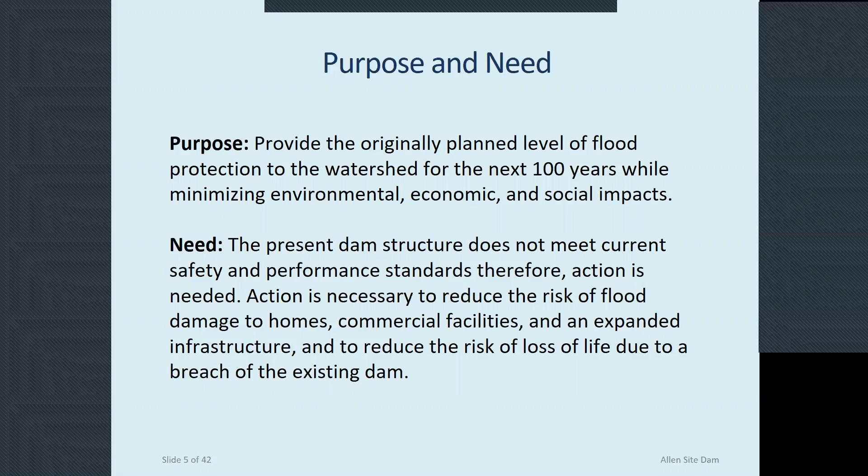So, dam rehabilitation, planning, and implementation process. This project goes back a number of years, and there is a specific process through, and we're in number 4, the planning portion of this process. That process is for selection of a preferred alternative, meaning this is what we're expecting to design and advance into construction down the road.

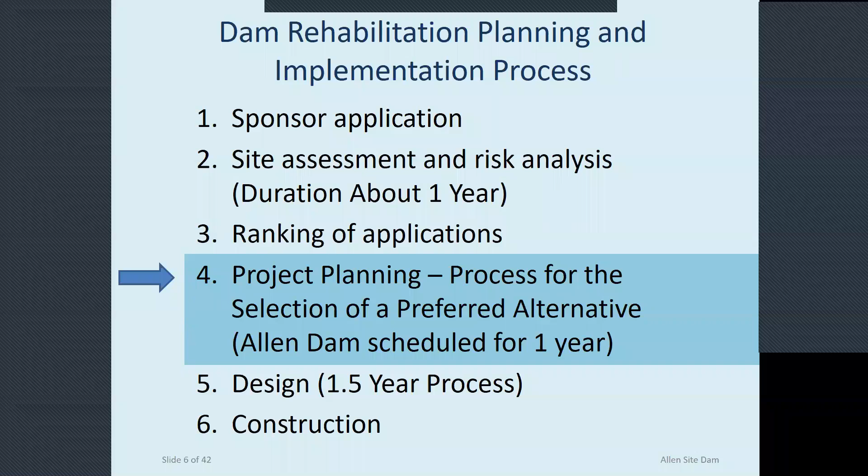The next step after this planning process, which is expected to be completed around July 2021, so 8 to 9 months from now, would be followed by final design and then construction, tentatively scheduled for summer of 2023.

As a brief recap, back in 2015 NRCS completed an assessment of this dam because the dam is approximately 40 years old, and they wanted to check in as part of their process. The outcome identified that there were some issues, nothing of significance, but mostly issues that will extend the safe use of this dam for the next 100 years. So the town requested assistance, federal funding assistance, working within the NRCS program.

In May of 2019, the project was advanced, funding was secured, and the project went into the planning phase. We came on board back in September of 2019. This past January 14th, Charlie and I and Darren, Jim, Carl, all of us were at Town Hall, where we made the first public informational presentation of this project. That same day we also had our first scoping meeting with various government resources and agencies.

At that meeting, we laid out what the purpose of the project was and the alternative formulation process. We also indicated that we'd be spending the summer and into the fall identifying and evaluating alternatives, and that we would be coming back and presenting these alternatives to the public in late fall. So here we are on the 17th doing just that.

So Charlie Johnston, our project engineer, is going to walk us through some of the specifics of the dam. Charlie, you have the floor.

Good evening. My name is Charles Johnston. I'm a project engineer. We just want to give you a brief background of Allen Dam. It was constructed in 1981, approximately 39 to 40 years ago, for flood control for the town of Walpole. It's located just southeast of Washington Street on the Diamond Brook, or Spring Brook as it's often referred to.

It's an earthen embankment dam, approximately 1,500 feet long and 21 feet tall. It consists of a two-stage concrete principal spillway structure, outlet pipe, and outlet works, with an earthen auxiliary spillway.

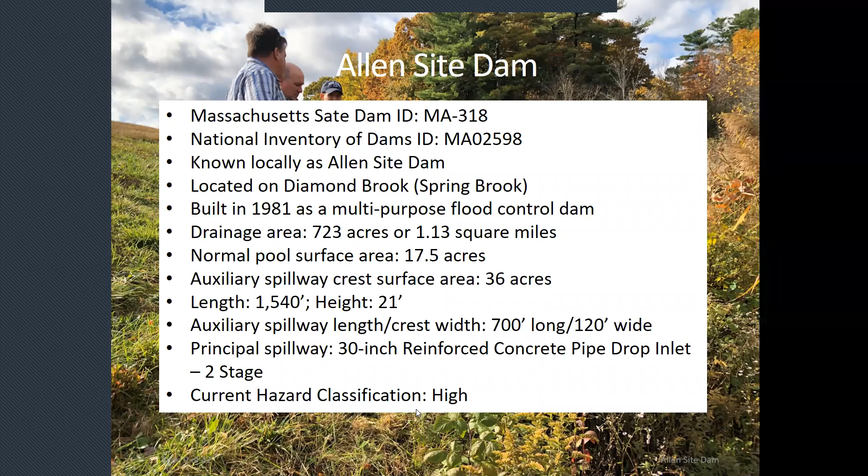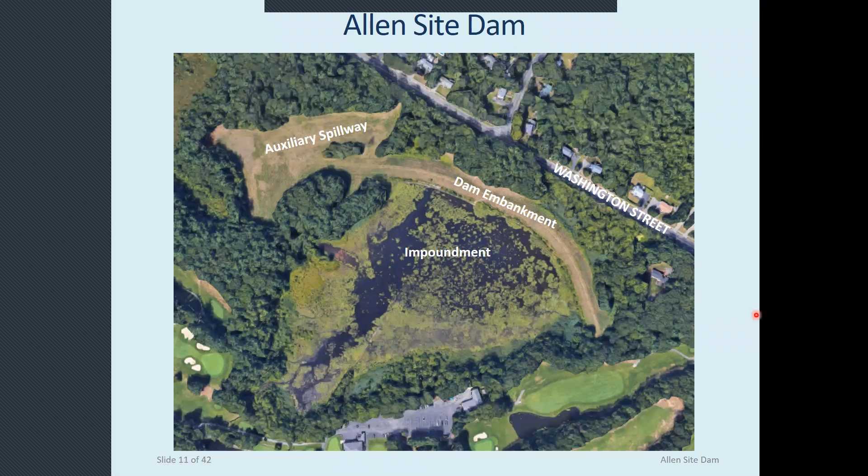I want to show you a typical cut view of an earthen dam to identify key components. We have the impoundment, which is the pond or reservoir behind the dam, the concrete structure and trash rack, which controls the normal water level and typically has a drop inlet for higher flood events. That discharges through an outlet pipe to the outlet works, which discharges downstream, and an auxiliary spillway, which controls flow for larger flood events, such as the 500-year flood event.

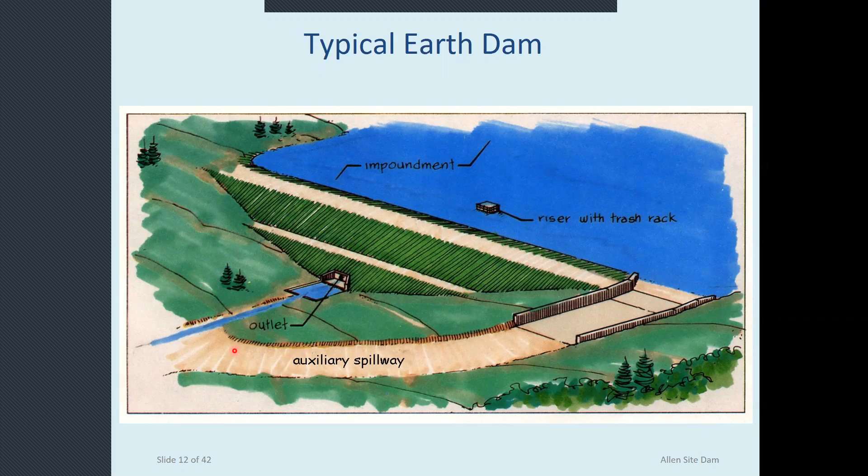Allen Dam is safe and is in good condition. It is not in imminent danger of failure. The purpose of this project is to implement preventative measures to extend the safe service life of the dam for the next 100 years and to prevent problems later on. The dam is inspected annually by the Public Works Department, and by Massachusetts state law is inspected by a professional engineer every 2 years. It's regularly mowed and maintained.

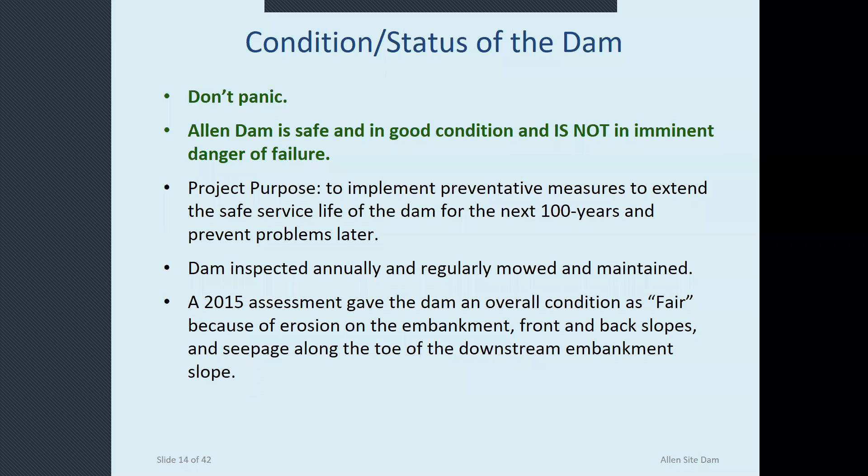A 2015 assessment of the dam found that it has an overall condition of fair, with some minor erosion occurring on the back and front slopes of the embankment and seepage occurring along the toe of the dam. Emily Lewis will explain the resource concerns for this project.

Thank you, Charlie. I'm Emily Lewis, environmental planner, and I've been working on the various resources. So we first began looking at these with the scoping meeting back in January, and then determining which ones are relevant to the proposed action or the preferred alternative that we will present later on this evening.

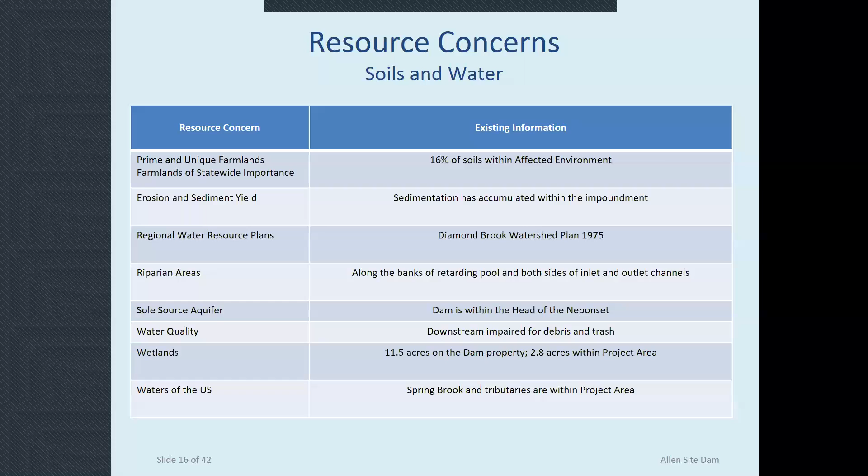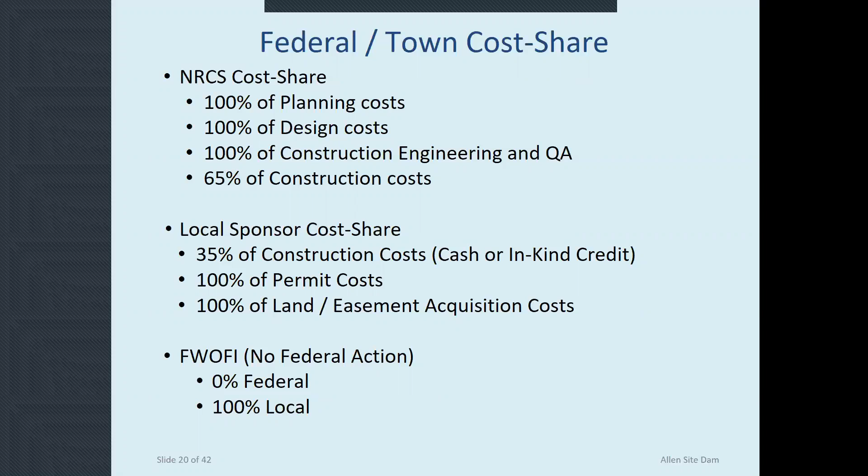The formulation process of the alternatives begins with the town of Walpole and NRCS. We've been working together here for the past 12 months, as we've said. We identified the deficiencies, the problems, and the need for the action. We've done detailed technical engineering work in developing these alternatives in conjunction with the PR&G guidelines that NRCS works towards, and identified these alternatives.

One that is required, as we just mentioned and Charlie will speak to in a moment, is the future without federal investment, decommissioning of the dam, meaning its removal, and removal of flood control. Non-structural alternatives include elevating structures out of the floodplain or relocating them, or updated zoning to prevent additional or future development. And certainly structural rehabilitation, repairing the dam so it meets both Massachusetts state dam safety and federal NRCS design criteria.

The locally preferred alternative normally aligns with one of these other ones, but we'll talk more about that in a moment. Similarly, the National Economic Efficiency, or NEE, which is part of the PR&Gs, ensures we're looking not just at costs, but other impacts including cultural, societal, historical, economic, and environmental. Lastly, the criteria for selection include completeness of the alternatives, their effectiveness, efficiency, and acceptability.

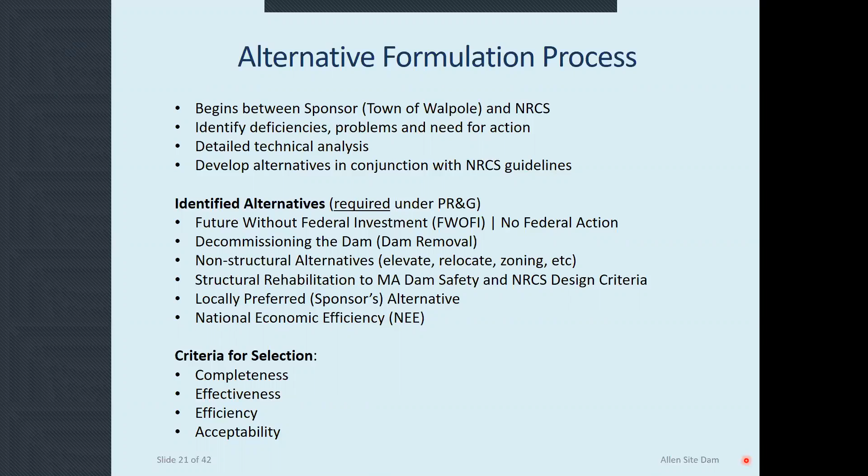The first alternative we were required to examine was the future without federal investment, or the no federal action alternative. This includes actions the dam owner, the town of Walpole, would take to correct deficiencies and bring the dam into compliance with Massachusetts dam safety rules. The primary deficiency is the inability of the dam to safely pass the half PMF, or half probable maximum flood. Hydraulic modeling indicates the auxiliary spillway is subject to significant head cutting or erosion, and a predicted failure through its control section may happen.

To correct this deficiency, this alternative consists of armoring the auxiliary spillway with an articulated concrete block system, or an equivalent armoring system, to reduce the potential for erosion and safely pass the half PMF. The estimated construction cost for this alternative was $2.6 million, of which the town would be 100% responsible, as no federal cost share is included in this alternative.

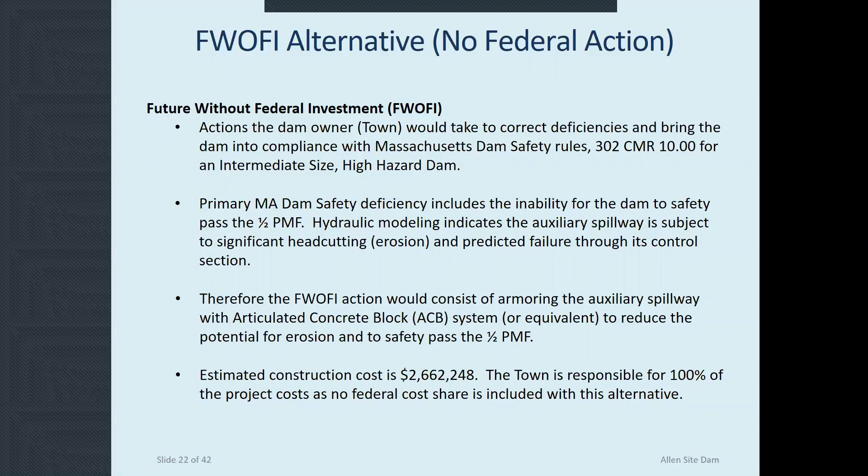Next, the required alternative we examined was decommissioning, or dam removal. This alternative includes removal of the flood control function from the dam, reconstructing and restoring the pre-existing stream and floodplain functions. It would involve excavation of approximately 7,400 cubic yards of soil from the dam embankment, demolition and disposal of the concrete principal spillway system, and restoration of the stream and upstream wetlands.

This also involves providing flood protection measures to structures and infrastructure downstream of the dam, including floodproofing buildings, acquisition and relocation of structures, infrastructure upgrades to buildings and culverts, and modifying zoning regulations to address future development in the floodplain. The estimated total project cost is between $7 and $8 million to implement the decommissioning of the project.

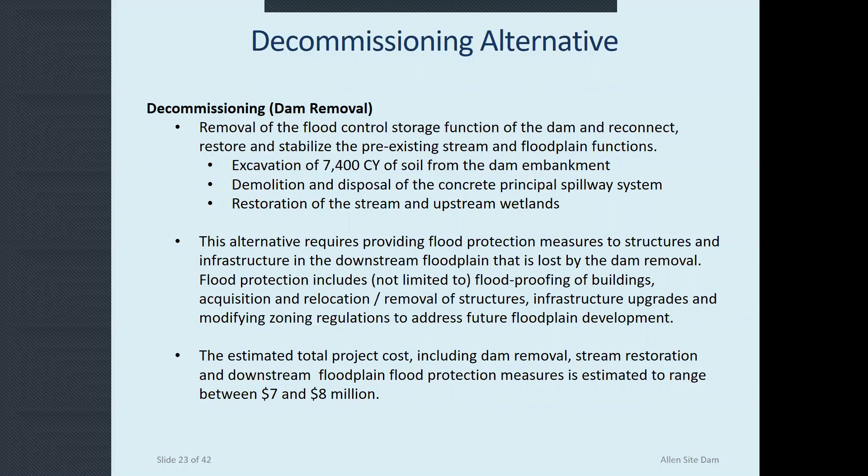We have a plan depicting the decommissioning alternative. Washington Street is located at the top of this plan. To the left is the earthen auxiliary spillway, and the dam embankment, which spans from left to right.

There's a notch that we have created in the dam where the 7,400 cubic yards will be removed, to remove the flood control function of the dam and then permanently drain the reservoir. The shaded area depicts where the stream would reestablish, and the crosshatch depicts where there would be a loss in that water surface, and you would probably see wetland conversion.

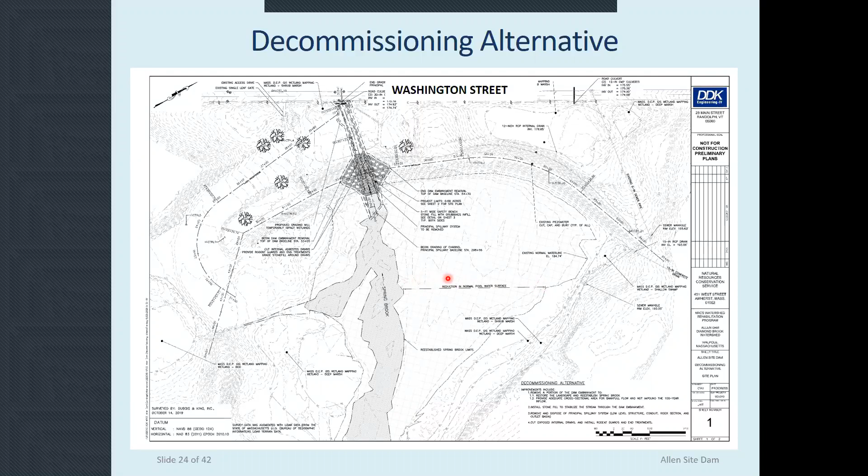Following the decommissioning example, we examined rehabilitation alternatives. These alternatives are to correct deficiencies that do not meet state of Massachusetts dam safety standards and NRCS criteria.

The primary deficiencies that do not meet the standards above include the existing auxiliary spillway being activated by the principal spillway hydrograph, a breach through the auxiliary spillway section during the half probable maximum flood and the freeboard hydrograph event. The dam is overtopped during the freeboard hydrograph event, and there are internal drainage issues with filter compatibility with the surrounding soils and seepage at the toe of the northern portion of the dam.

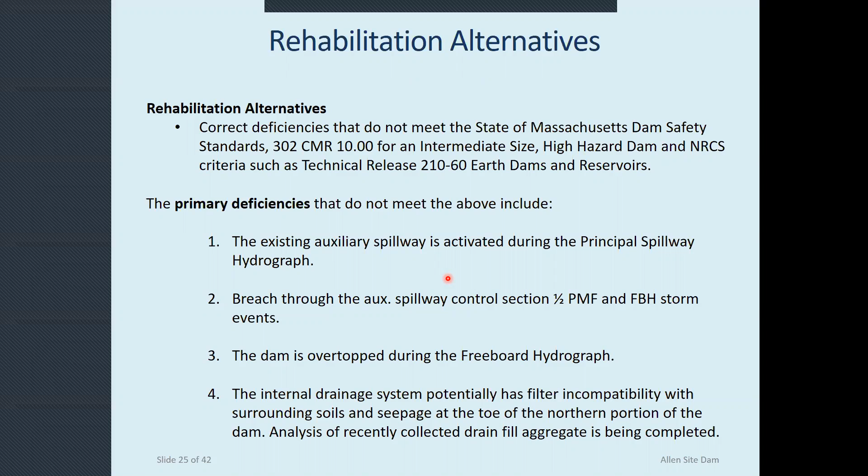In the prior slide, we identified that the rehabilitation alternatives are required to correct the deficiencies in the dam to meet federal and state dam safety criteria. We identified 7 structural rehabilitations that could occur at Allen Dam.

Alternative 1 consists of raising and armoring the auxiliary spillway with articulated concrete blocks, maintaining the pool at its original water level, and raising the overall top of dam embankment by 9 inches.

Alternatives 2 and 3 are similar to alternative 1, where we raise and armor the auxiliary spillway, raise the dam, and maintain the pool level. But instead we will be using two different auxiliary spillway armoring technologies: one with roller compacted concrete, and the other with a concrete precast subsurface slab.

Alternative 4 is also similar to alternative 1. However, we're going to widen the auxiliary spillway from 120 feet to 155 feet to increase the hydraulic capacity so that we can reduce how much we need to raise the dam.

Alternative 5 is similar to alternative 1 as well. Instead, we're going to lower the pool approximately 1.8 feet to provide additional flood storage capacity so that we can reduce how much we need to raise the top of the dam.

Alternative 6 consists of constructing a new auxiliary spillway over the dam embankment with roller compacted concrete, abandoning and filling the existing auxiliary spillway, and raising the top of dam by 9 inches.

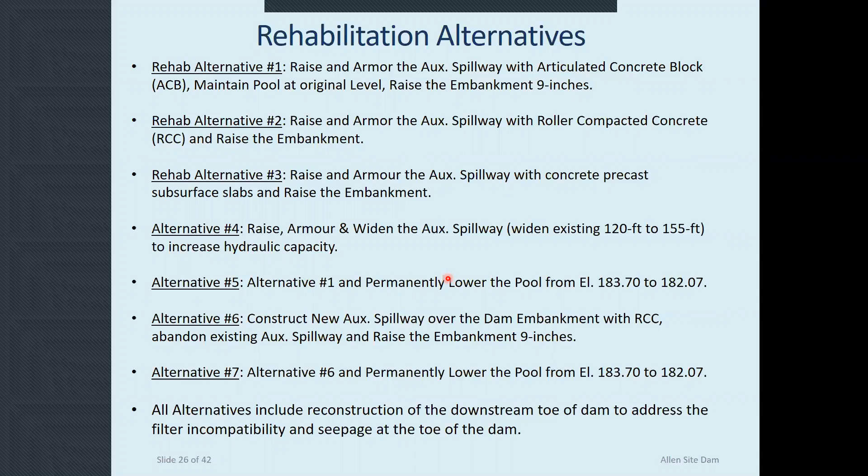As part of our alternative formulation process, we need to consider but eliminate alternatives that do not fully meet the PR&G criteria. At Allen Site Dam, this includes the decommissioning alternative, non-structural alternatives, as well as rehabilitation alternatives 2, 3, and 4.

Decommissioning was eliminated because it has a significant and adverse impact to cultural and societal resources downstream of the dam, as well as the cost to implement being 2 to 3 times greater than the cost of the future without federal investment and the retained rehabilitation alternatives.

The non-structural alternative, similar to decommissioning, includes elevating, floodproofing, and relocating buildings in the downstream floodplain, modifying roadways and infrastructure, and zoning requirements. This was eliminated because it does not address the deficiencies at the dam and may allow the dam to fail in the future. In addition, the estimated cost is $10 to $15 million, much larger than the rehabilitation alternatives that we retain.

Rehabilitation alternatives 2, 3, and 4 were also removed because they provide the same level of flood protection, but have a higher construction cost.

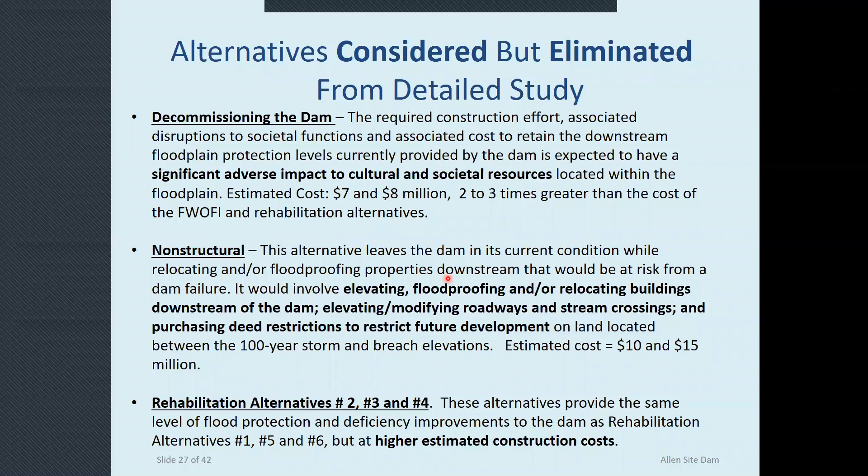The alternatives that meet the PR&G criteria and were retained for detailed study are: the future without federal investment, or no federal action; structural rehabilitation number 1, utilizing articulated concrete blocks for armoring; alternative 5, which is alternative 1 with a lower pool for flood storage capacity; alternative 6, which constructs a new auxiliary spillway over the dam embankment with RCC; and alternative 7, which is alternative 6 with a lower pool for flood storage capacity.

The next several slides will illustrate the structural alternatives that were carried forward for detailed study.

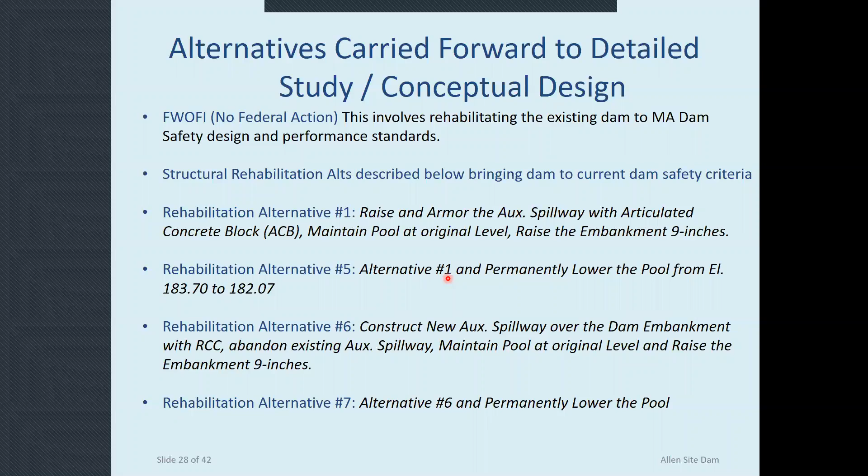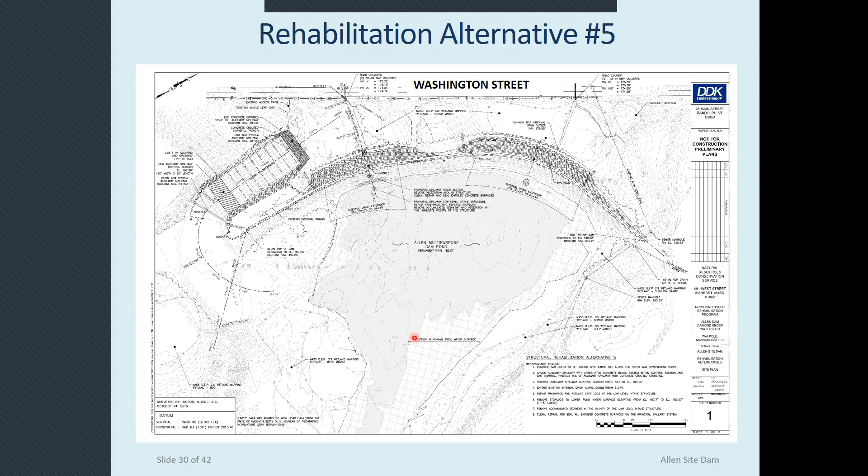For alternative 5, there are similar improvements to the dam with auxiliary spillway armoring, the top of dam being raised, and reconstruction of the toe. This alternative utilizes a reduction of the pond by 1.6 feet, which is the main difference between alternative 5 and alternative 1. The cross-hatched area is where we expect we'll need to reestablish wetlands, and the shaded area is where we expect the permanent pool to be established.

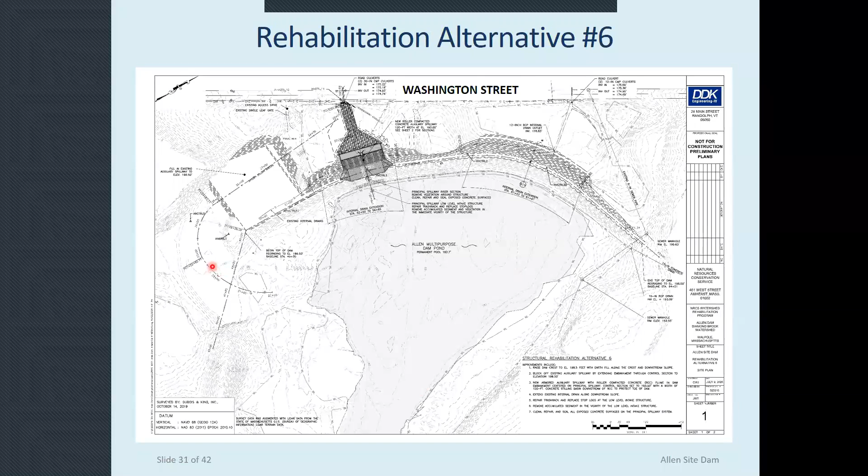Alternative 6 utilizes reconstructing a new auxiliary spillway over the center of the dam with roller compacted concrete, a new stilling basin, and reshaping of the downstream channel. Excess material will be used to fill in and abandon the existing auxiliary spillway and to raise the dam embankment. The downstream toe will be reconstructed for filter incompatibility and seepage at the northern portion of the dam. Improvements to the principal spillway structure are included.

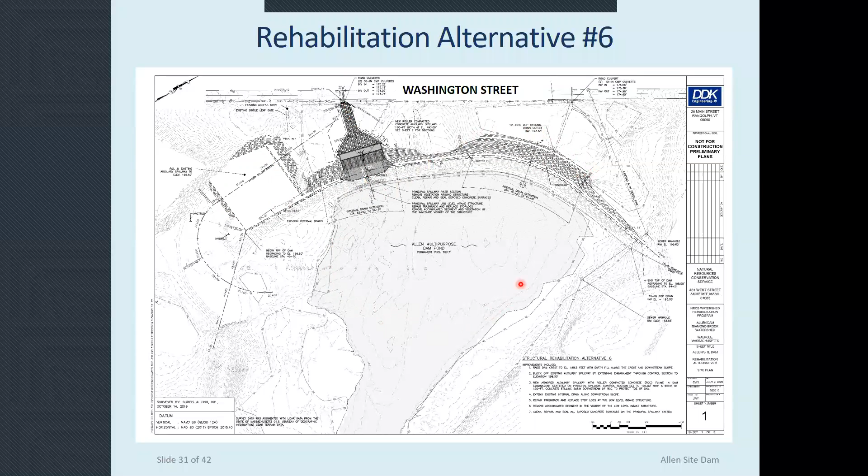This alternative utilizes the existing current normal water surface. Similar to alternative 5, alternative 7 will also have a lowered pond and will utilize alternative 6 improvements at the dam.

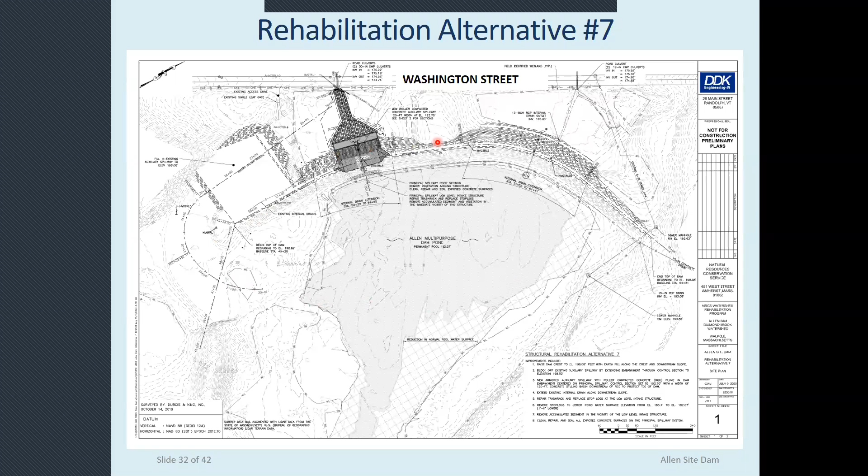I'm going to send this over to Jeff to describe what we did for detailed study at the dam. Thank you, Charlie.

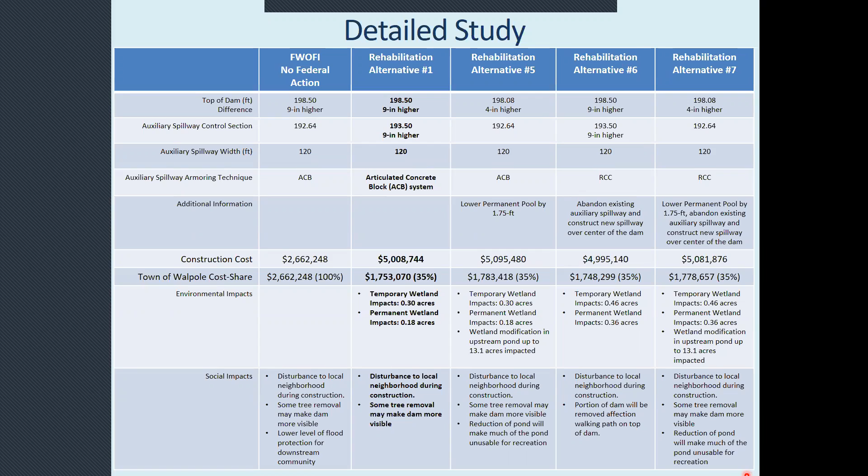For alternative 1, the overall construction cost is just over $5 million. Because this would be a project under the NRCS program, the town would pay 35%, or approximately $1.75 million. Alternatives 5, 6, and 7 have very similar cost estimates—one reason they were selected is that they're all within the margins of error on cost estimating. However, there are significant differences in impacts, particularly regarding draining or permanently lowering the pond, as Charlie mentioned.

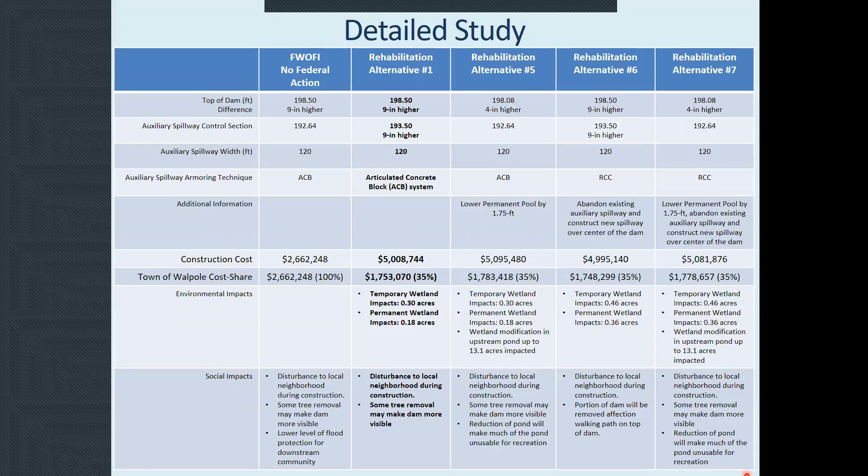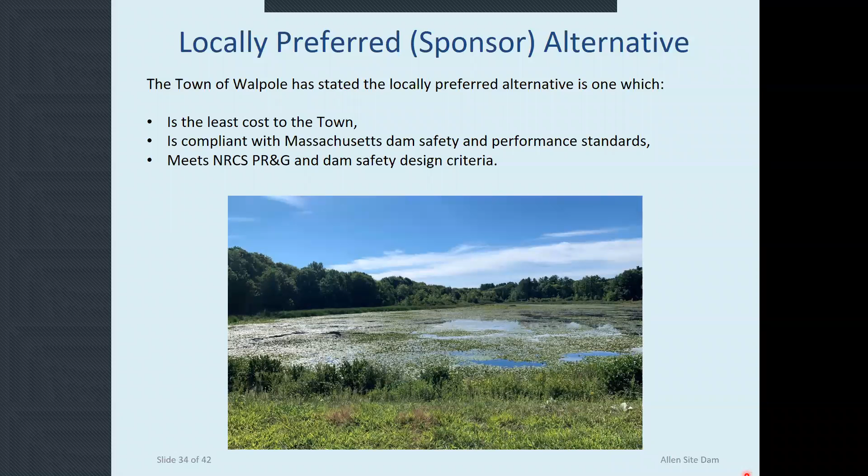So as we go to the next slide, we wanted to highlight what the sponsors, or the locally preferred alternative, would be. Folk at the town have stated their preferred alternatives as we talked to them. One is that it's least cost to the town. Secondly, it is compliant with state dam safety performance standards. And one that also ideally partners with NRCS and meets the PR&G and federal dam safety design criteria. We can bundle all of those together. That would be the locally preferred.

And lastly, as we go through these different alternatives, eliminate some, and do a detailed evaluation, we come to the preferred alternative, which is rehabilitation alternative number 1. Charlie just walked us all through that, but I'll reiterate: that's the alternative that maintains the permanent pool where it is now, so it is not a permanent reduction. It requires us to raise the auxiliary spillway control section by approximately 9 inches and armor that spillway, in this case with articulated concrete blocks. Otherwise, it would be subjected to erosion and potential failure during major storm events.

Associated with that is some downstream stone fill to a cutoff trench to help prevent head cutting or erosion. And as Charlie mentioned, we have some work to do with the downstream toe of the dam to extend and repair the existing internal drainage system. This alternative includes repairing the trash rack and the principal spillway riser, and also the stop logs out in the water where that low-level control structure is. It also includes a new walkway from the dam embankment out to that low-level trash rack for future maintenance. There would be some minor or limited removal of accumulated sediment within the vicinity of that low-level outlet, just to get all the accumulated material that's there so it's functioning again for the next few decades. And we'll clean, repair, and seal all exposed concrete, to extend the life of the concrete that's out there. It's in good condition, and cleaning, repairing, and sealing it extends that.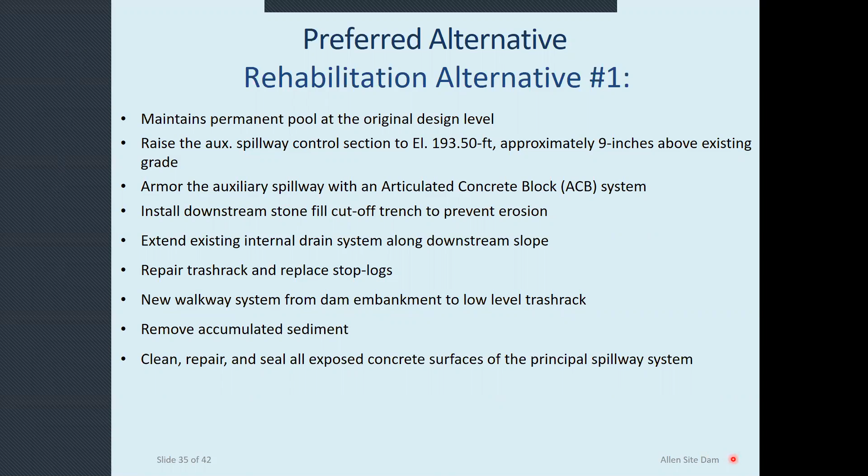Again, the auxiliary spillway will be armored with articulated concrete blocks. In the end, we ended up installing a subsurface cutoff wall in the control section, and then we finished the articulated concrete blocks with a stone-filled trench that would be filled with concrete to prevent propagation of head cutting through the auxiliary spillway. The dam would be raised by 9 inches, and the toe of the dam on either side would address filter incompatibility. On the downstream slope where the water discharges, we would be armoring it with stone fill to prevent erosion. And then we would be improving the principal spillway structure. Some sediment has accumulated around the principal spillway intake that's in the pond, and we will be removing that as well.

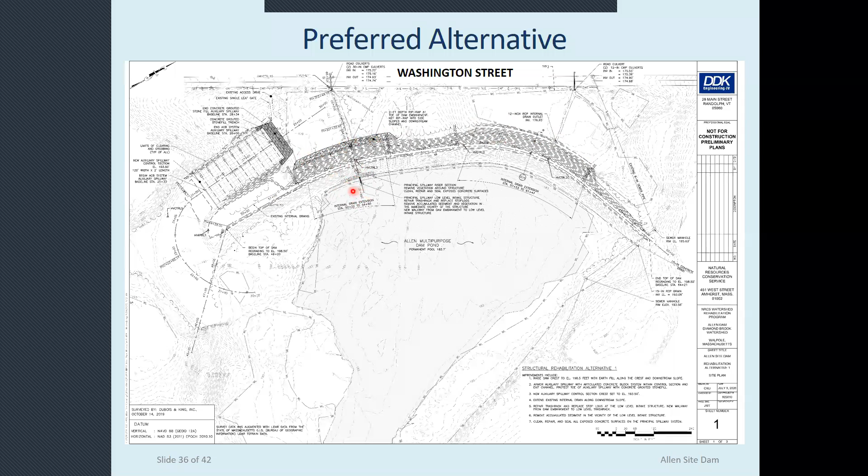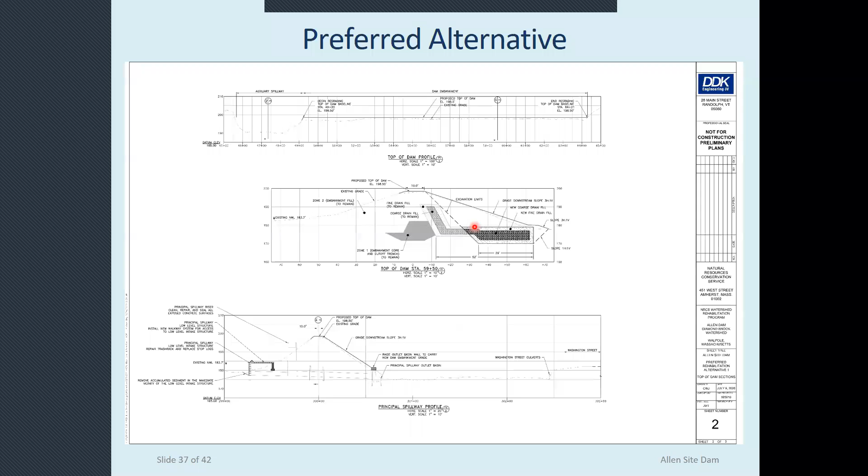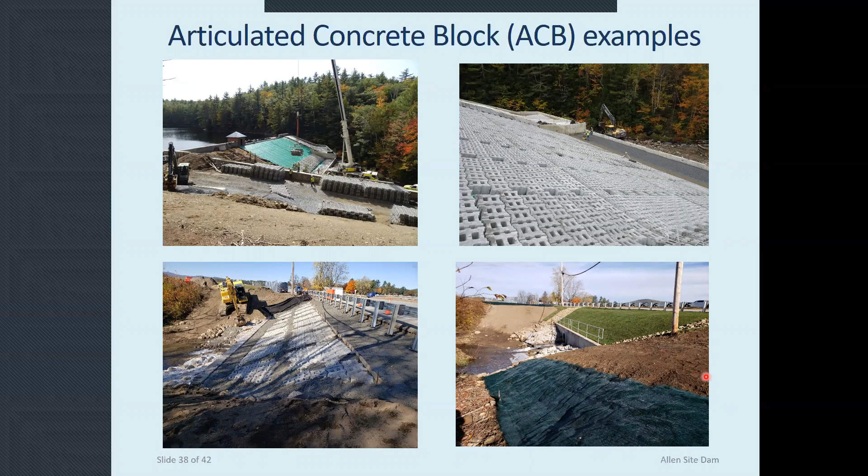The preferred alternative utilizes articulated concrete blocks. We have a few images here to show examples of that. In the upper left, we have a crane lowering these blocks in. They come on like a bungee system and are lowered together, which you can see in the upper right. Eventually they're concrete grouted together, shown in the lower left. And if the town chooses to, or typically what's done, they're covered with topsoil so that you can't see them when completed in construction.

I'm going to move over to Emily to explain the environmental consequences.

For the temporary impacts, we'll have some things such as air quality, dust and exhaust that will occur during construction. With the temporary drawdown of the pool for construction, there will be a temporary reduction of habitat and riparian areas. There will be a temporary loss of use for recreation until this is complete.

And of course, you'll have views during construction. We'll have construction equipment and not quite have that same scenic beauty for a season.

The permanent impacts, mostly looking at wetlands, there would be about 0.18 acres of wetland permanently impacted, and a few temporary impacts as well. Some minor cutting of trees in the construction area.

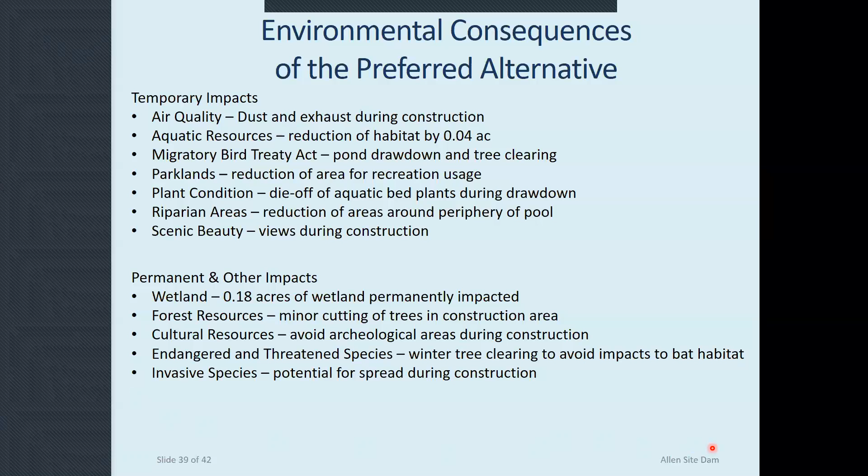Yep, we want to go over the economic viability of the preferred alternative. This is done by analyzing the annual benefit of the dam for the difference in damages in the downstream floodplain between the without and the preferred alternative. We do this by using some hydraulic modeling of various flood events through the downstream floodplain with the dam in place, with the preferred alternative, and without the dam in place.